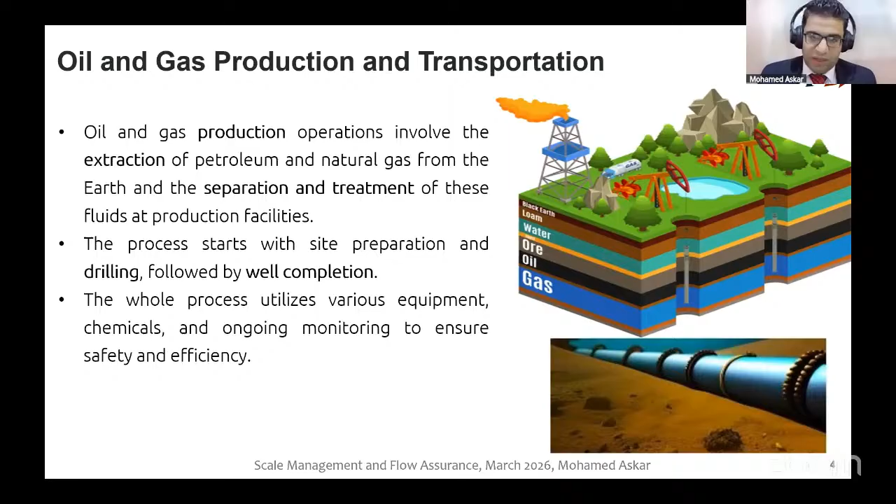Then I direct this production to the facility for separation and for consumption and for transportation and distribution to the consumer. But my point is to produce it safely without any problem, without affecting the integrity of the pipeline, without affecting the integrity of the well itself. So flow assurance means that I need to produce the hydrocarbon and reach its target without any problem.

This problem is maybe restricting the flow itself. My target is to maximize the flow, optimize the flow, produce the well as much as I can without affecting the resources, without affecting the environment. So I need to remove any obstruction inside the flow line and inside the well itself.

The second part is to prevent any leakage to the environment. This leak may affect the environment, affect the people around it. So I need to use many disciplines like chemistry, production technology, production engineering, and many other disciplines that can manage to make this mission successful and take the oil and the gas from underground till the separation and distribution efficiently and safely.

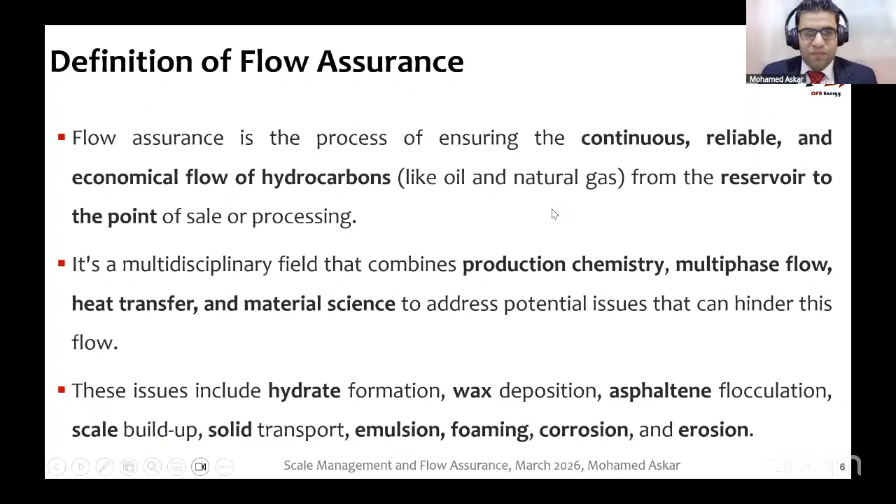So the most common types for flow assurance is that I have some blockage inside the flow line itself or inside the well downhole. This blockage may be scales, which is the main topic today. These scales may be calcium carbonate, barium sulfate, zinc sulfide. We have many types of mineral scales, and also some solid deposition called paraffin and asphaltene.

You can see the pointer right now, right? Is your screen good? Yes, we can see it. Yes, we can see it.

Good, great. So flow assurance, we talked that we don't need to restrict the production. We need to maximize the production rate and make it efficient production. So I need to remove any restriction inside the flow line itself, which may be scales, paraffin and asphaltene. We will see the difference between paraffin and asphaltene, and maybe hydrates.

Hydrates is a combination between gas and water, as you saw in the pre-course assessment. And also emulsion and foam. There are some types of that. You have a mixture. Emulsion means a mixture of oil and water, maybe emulsion oil in water or water in oil, but you have like a colloidal state between the two regimes, between the two phases, which have high viscosity.

So you have many pressure losses in the flow line. Foam means that you have a liquid and the gas, and you are having a mixture, and this mixture also makes additional pressure losses. For the integrity, corrosion means that you are interacting with the metal parts of the flow line and the pipeline and any metallic parts like the Christmas tree, the tubing, the casing, and affecting their integrity chemically. But erosion is mechanical, that you are producing some sand due to the impact of these sand particles.

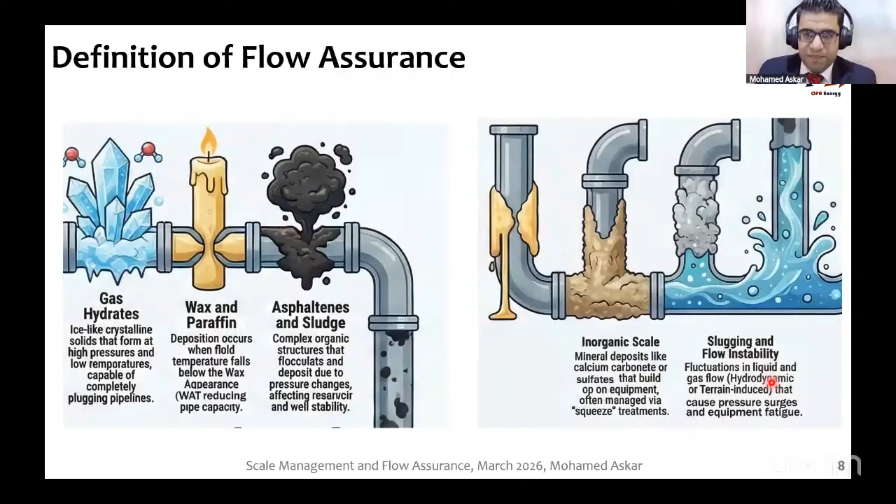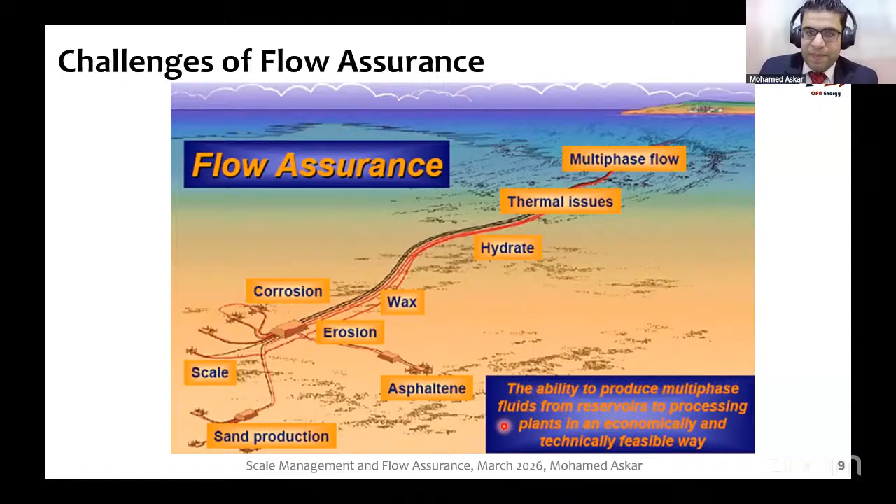So for a single flow line, I may have all the issues at the same flow line - I may see scales, hydrate or paraffin deposition. But for subsea pipelines, I may have corrosion inside and outside, because you are producing oil with water from inside the flow line itself, and outside the pipeline you have seawater. So you can use coating for the pipeline outside to prevent seawater interaction and prevent any outer corrosion.

For us as a petroleum engineer, what is my target here to care about? I care about the reservoir - I have hydrocarbon inside it, and I will start with the reservoir pressure. When the oil or gas flows from the boundary to reaching the sand face, it will have some losses. These losses depend on the permeability of the formation and the viscosity of the fluid, Darcy law, and other issues like pressure differential, length, and area. If you have some skin, that means you have scales or damage inside the formation itself, so I have pressure losses here.

Then you will have pressure losses through the completion itself. The completion means if you are producing from open hole, it means low pressure losses. But if you are producing from sand screens and gravel pack, it will be high pressure losses. Then I will have the bottom hole flowing pressure.

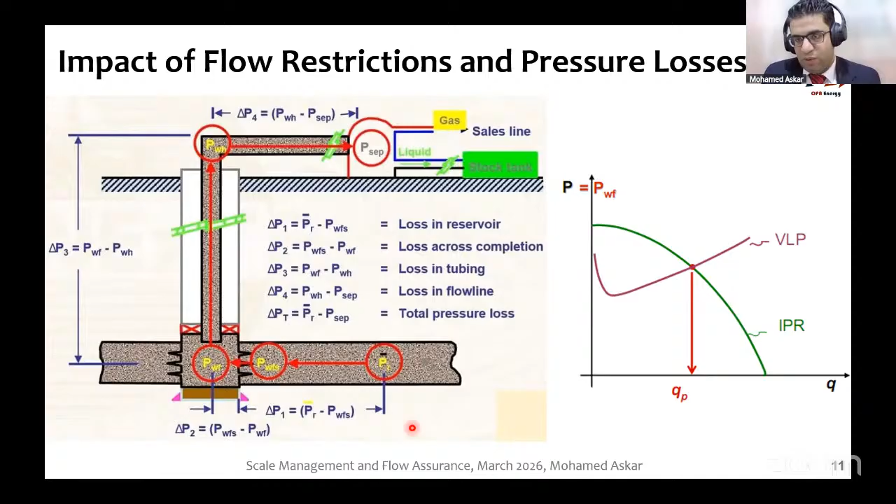So we agreed that we are producing oil or gas, but this oil may be accompanied by water or gas. In the reservoir, we have a gas layer due to its low density, then oil, then water. I can use this water by injecting it inside the reservoir to increase pressure and increase production. But at some time, I may see water breakthrough, meaning the water gets through the perforation and I now produce water with oil.

When I produce water and oil at the surface, due to low pressure, the gas will get liberated again from the oil. So in the pipeline, a horizontal pipeline, we'll see separated phases of gas, oil, and water. But do you see that it will be a pure gas, pure oil, and pure water? No, it will be gas with some droplets inside it, maybe dispersed oil or dispersed water. You should have some mist flow of liquids inside this gas.

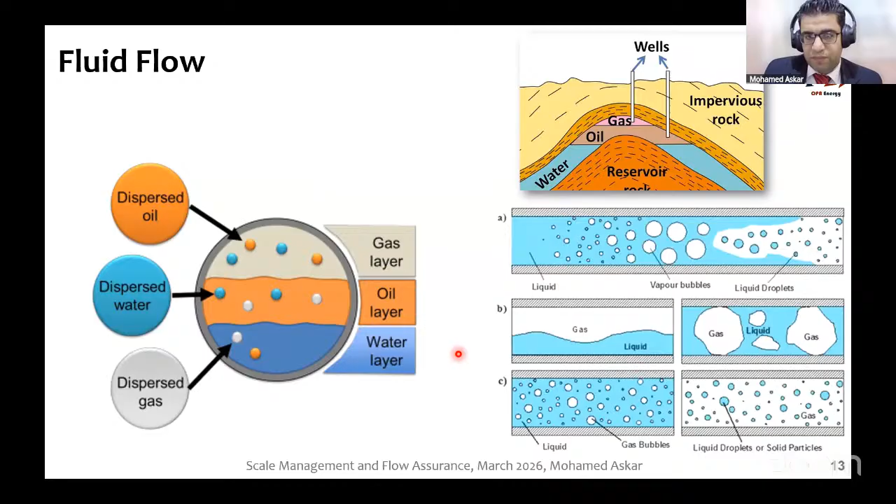But due to the crude oil itself, which may be oil or gas in the reservoir, having many components, these components number in the thousands, starting from methane, ethane, propane, butane, and complex ones like asphaltene and long chain paraffin. But due to the density itself or the oil state, I may have some black oil. This black oil is in the liquid phase in the reservoir, but after production, I will reduce the pressure, so I will get inside the two-phase region.

The two-phase region is where I will have multi-phase flow. For the volatile oil, it's the same, but the oil is much lighter. For the gas, I may have some dry gas, where the gas is in the gas phase at the bottom in the reservoir, and in the gas phase at the surface and the separation unit, without having any gas condensate. But for wet gas or gas condensate reservoirs, at the separation point, I will see some liquid.

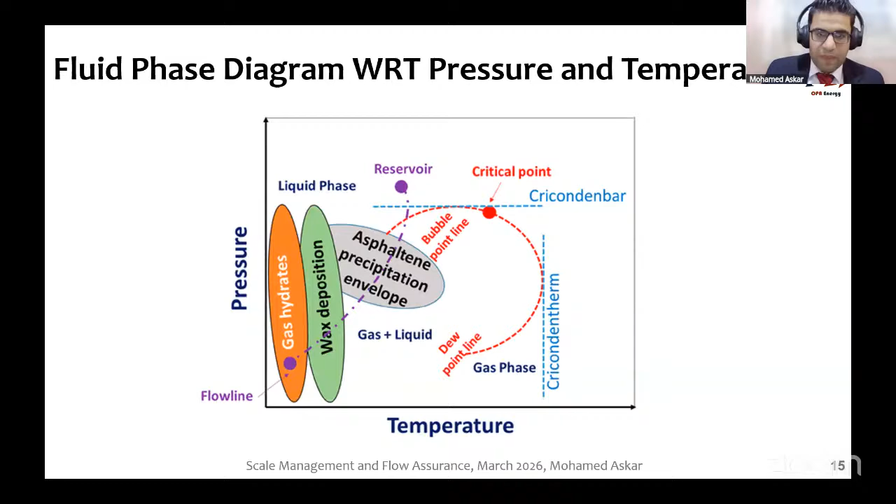So for flow assurance, we have many items to deal with. We should start with the reservoir fluids.

You should take a sample from the reservoir, the downhole sample - preferred to be downhole, not a surface sample, during exploration or first production, maybe during the drilling phase, drill stem test. We have tools like RMT, reservoir monitoring tool, MDT, modular dynamic tester, and RST, just to take samples downhole from the well itself against the perforation, keeping it under the pressure and temperature of the reservoir, then bringing it to the surface for more analysis to see what components you have - if it's water, what minerals are in it; if it's oil, what is the phase behavior, and what is the asphaltene and paraffin content.

So we'll start from taking a sample from the fluid itself. Then we study the sample to see if I have some problems inside the production - what is the viscosity of the fluids, what is the modeling, if I have some slugging or surging or not. If I have slugging, I use a slug catcher or smart choking or intelligent choking to prevent slugging.

And for heat transfer, we talked about how when you reduce the temperature, mainly for subsea applications and subsea flow lines, we'll see some flow assurance issues which may be hydrate, scales, paraffin, and asphaltene deposition. So I need to insulate the flow line to prevent heat losses.

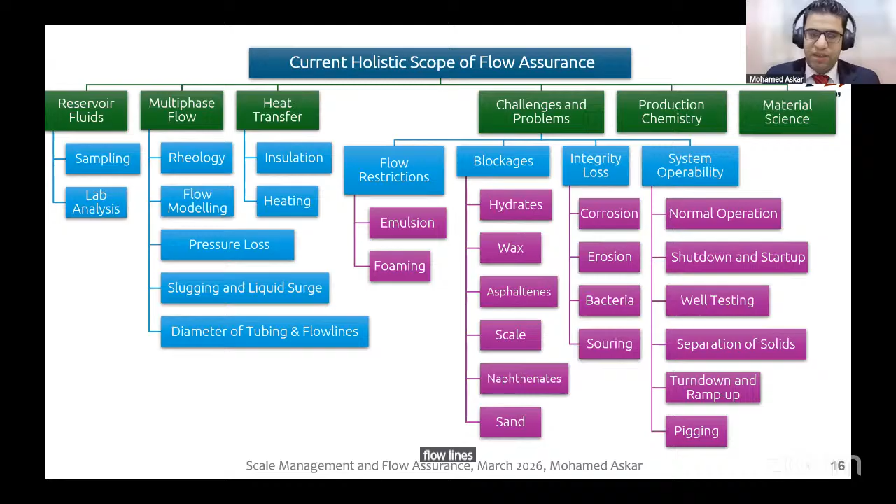We can also add other elements, maybe chrome, vanadium, molybdenum, nickel, aluminum, silicon, or other minerals that get inside the alloy itself and enhance its properties - enhance the corrosion property, enhance the elasticity, make it more ductile, enhance the stiffness and strength. But mainly we talk here about material selection for corrosion, so I need to use a corrosion resistance alloy to prevent the corrosion issue, which is a flow assurance one.

So here's an open discussion with you. What are the sources of flow assurance problems? You now know that we have flow assurance problems, so what are the sources of these problems? Can you tell me some thoughts about it? You can open the mic now. I'll wait for your answers and contributions.

Hello, guys. Can we have some volunteers?

Sorry, can you repeat the question? Yeah, what do you think are the sources of flow assurance? You know the problems of flow assurance are scales, paraffin, asphaltene, corrosion, erosion. I think pressure change, temperature change, all this will be a source.

Good, mashallah. So pressure change means that you are producing the reservoir without any pressure support, right? Correct. Good. Other attendees, do you have any thoughts about this one?

Also, I want to say water production will be a source of hydrates. MashaAllah. So when you produce water - our target is not to produce water, we are producing oil or gas - but this water may be due to formation water breakthrough or water injection fingering. And we have some water with the fluid itself, and at the surface we have some emulsion, agitation between the oil and the water, and we have some problems or maybe scales due to water or corrosion.

It may be chemical reactions or solid deposition, temperature and pressure changes.

Good. I will give you some hint about my answer. Do you think that drilling can affect flow assurance?

If you know the wettability, my formation needs to be water wet, so it can stick to the water and I can produce oil. But due to these chemicals, maybe surfactant or mutual solvent, they can affect and change the wettability to make my formation oil wet. So the production rate will be reduced.

I told you at the beginning that flow assurance means I need to produce the well, the system itself, efficiently with high production rate, economically with low cost, and without affecting the environment, without any leakage. Right? For production, my question for you is: production promotes pressure losses and pressure reduction, and also temperature reduction. You are producing from downhole, and during the pass from down till the surface and through the surface pipelines, you'll have temperature reduction, right?

Good. Do you have any other thoughts about the sources of flow assurance? Any other new guys?

Wettability alteration, due to water coning, chemical issues, water fingering, and excessive sand production. Some reservoirs are unconsolidated, so after production they produce sand and solids. This sand causes erosion for the flow line and tubing, and may promote emulsion.

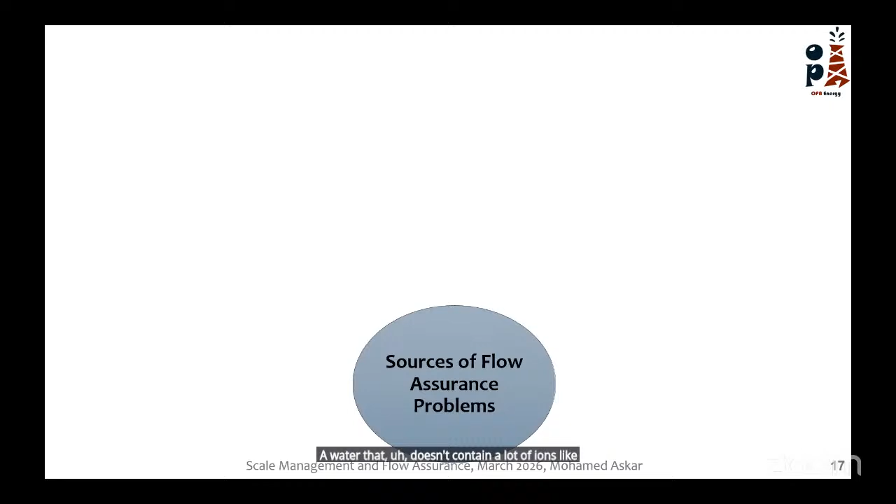What about water injection itself in the injector well? When I inject water in the well, can I introduce some damage to the injector itself? Yes, sometimes if we inject water that doesn't contain a lot of ions like chloride or sulfates, that creates a basic environment in the reservoir, and that favors shale swelling.

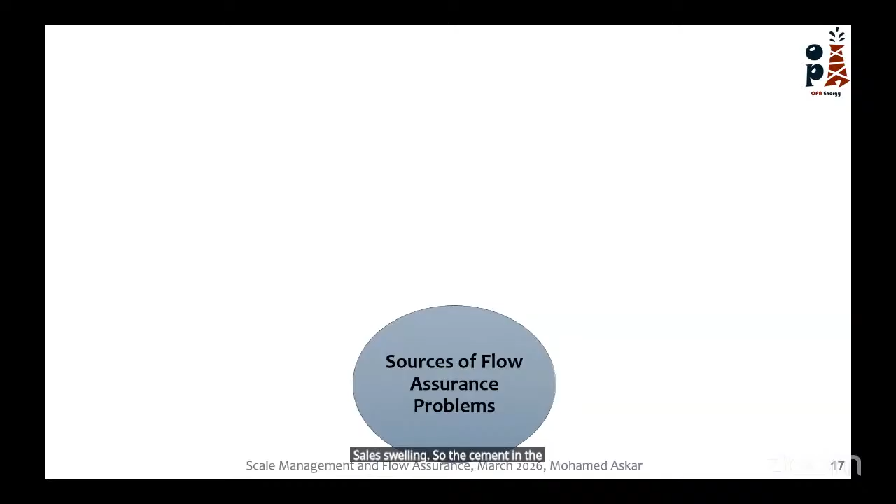The cement in the reservoir, like chlorite, kaolinite, or illite. This is called clay swelling - when you inject water inside the well and you have clay minerals in the formation, this clay gets some swelling, becomes bigger, closes the permeability, and makes damage, reducing the injectivity of the well.

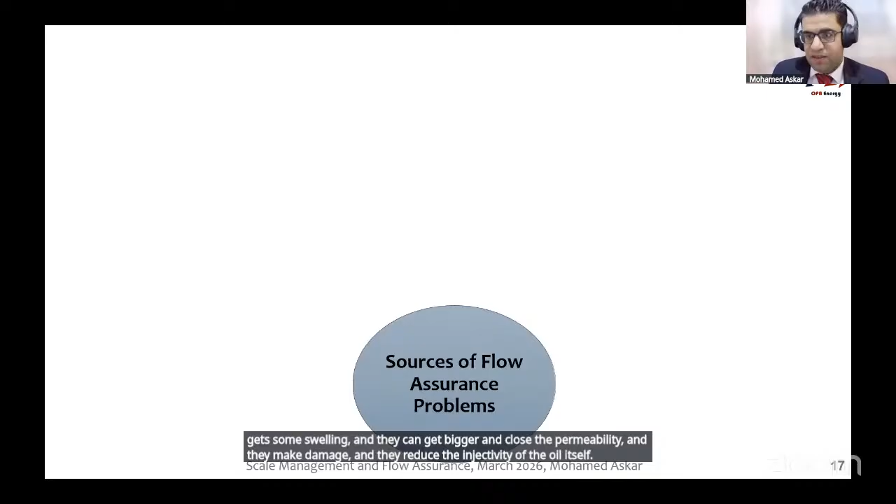It's a good point, and you also hinted about the quality of the water itself. You should make sure the water is good quality, will not affect the formation, will not cause plugging, will not cause scale deposition, and should not contain any oil.

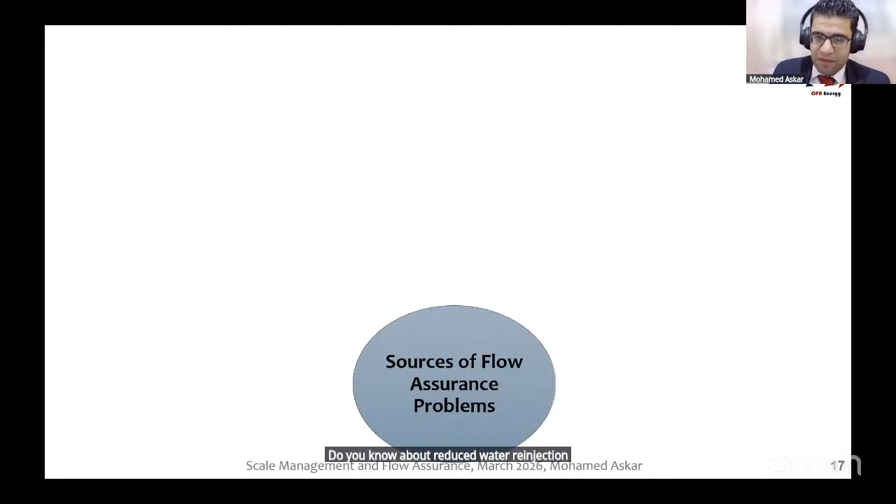Do you know about produced water reinjection, PWRI? When you take the production water and inject it again in the injector wells, you should process the production water and remove any solids, chemicals, and oil, because injecting them again inside the injector wells will damage the formation and reduce the injectivity with time.

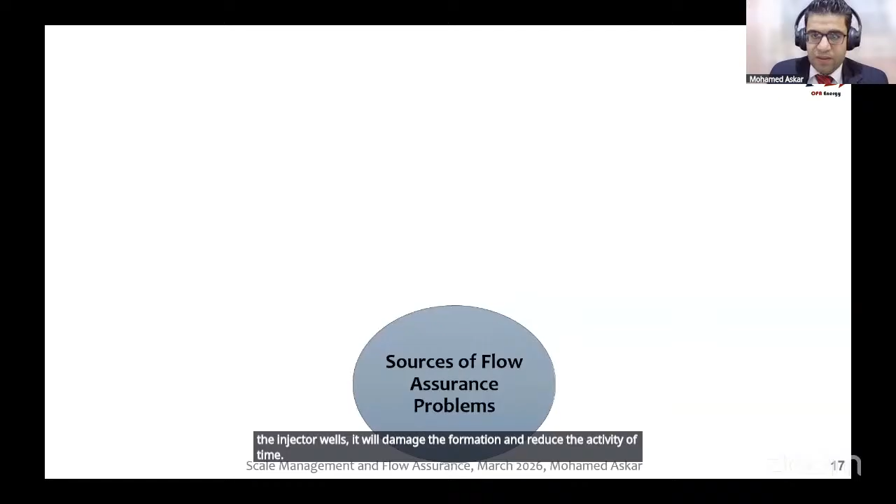Okay, good. So these are the issues and root causes of flow assurance.

We talked about drilling and completion. I can introduce some foreign fluids to the formation, and they may change the wettability. They may also introduce some solids - the mud filtrate and mud filter cake are solids and fluids that get inside the formation and affect the permeability.

During production, I have pressure depletion and pressure losses, and some gases will separate from the fluid, causing a change in pH - this is gas stripping. Some fluids can deposit asphaltene due to pressure and temperature reduction and heat losses, mainly for subsea applications and offshore wells. You have a big temperature decline, which promotes scale deposition and paraffin deposition.

We talked about restrictions and the completion inside the downhole completion. They introduce more pressure reductions, more restriction and choking, which reduces pressure and disturbs the fluid, potentially promoting deposition. We should design the surface facilities and downhole completion efficiently to prevent additional pressure losses, to conserve heat, conserve pressure, and to inject chemicals.

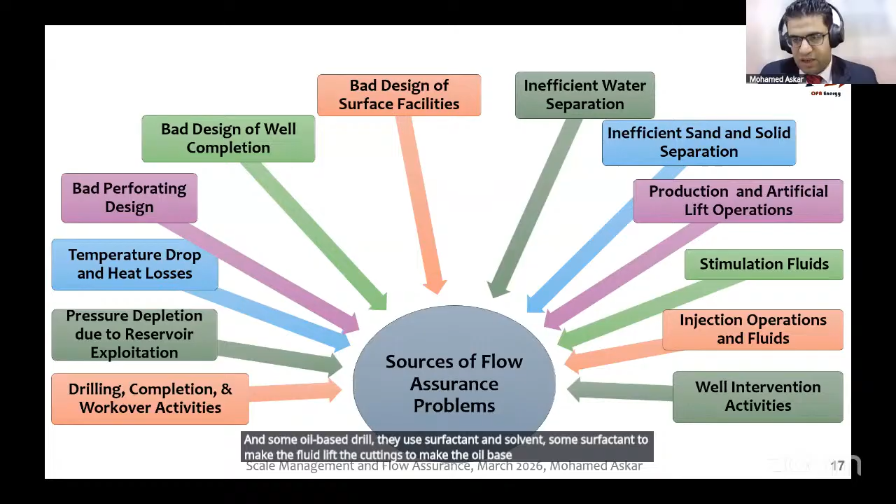Some oil-based drilling fluids use surfactant and solvent to help the fluid lift cuttings. When you find that the wettability of the formation has been changed, you should restore it by washing the grains with other types of mutual solvent and surfactant, maybe diesel, xylene, and hydrocarbons, to clean the grains and restore wettability. Surfactants may have different charges, negative or positive, depending on the formation itself.

For water, I should remove it from the oil to prevent emulsion formation, and remove it from the gas to prevent hydrate formation. The glycol unit is a unit that can strip and remove water from the gas stream.

For artificial lift, some pumps cause agitation, and gas lift also causes agitation and severe mixing of the fluids, promoting emulsion. Gas lift means injecting a large amount of gas through a small valve, which expands very fast due to the Joule-Thomson effect, introducing more cooling to the well, and this cooling promotes scale deposition.

For stimulation fluids, injected acids may interact with asphaltic crude oils and produce sludge, a type of formation damage. For injection operations, injection water should have good quality to prevent formation damage to the injector. Any fluid introduced to the wellbore should use corrosion inhibitor, scale inhibitor, anti-clay swelling agent or clay swelling inhibitor, and other additives like oxygen scavenger, to prevent corrosion, interaction with the fluid, and deposition inside the formation, preventing formation damage.

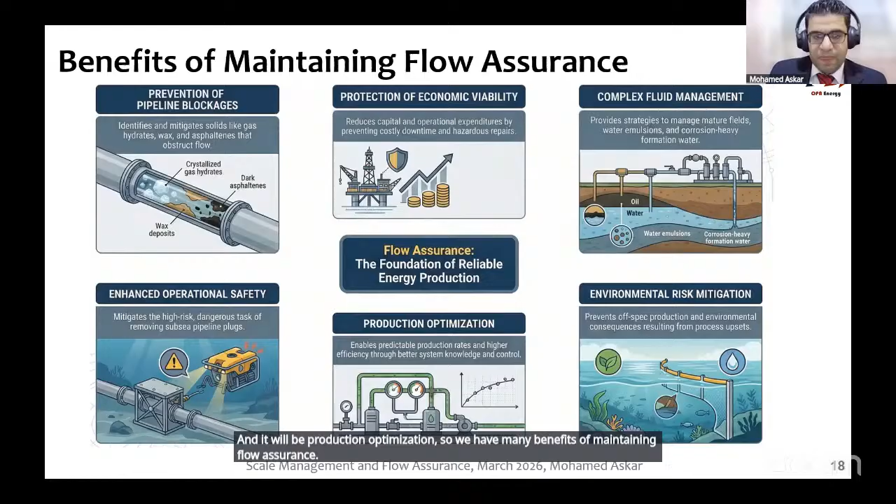So this is a question for you: what is the starting point to apply flow assurance issues or flow assurance management? My opinion is I will start from production, since I am producing oil and gas, so I will care about flow assurance to see what issues I will face inside the process facilities. Do you agree with me or not?

Hello guys, do you have any thoughts about my opinion? For me, it's development actually. What is the reason? For other participants, do you have any thoughts about what is the starting time to care about flow assurance, during production or development?

Good, so you agree with me and also with Rawa, I think. And Ibrahim mentions in the comments that within the flow we can detect flow assurance issues and see the phenomena. I need some other guys' thoughts, we have 27 people in the webinar, it's okay to say what you think, it may be wrong or right. I said my opinion, I will start flow assurance from production. Is it right or wrong?

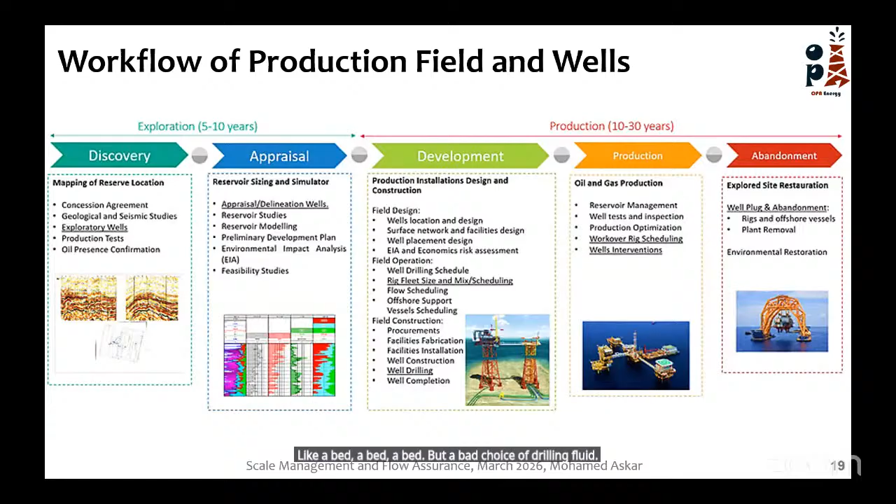Okay, so we care about flow assurance when we start production. Yes, but sometimes we can face it in the discovery phase, perhaps due to a bad choice of drilling fluid or a bad design of completion. Good, this is the answer I'm waiting for. My answer, to care about flow assurance only from production, is actually a very wrong answer. I told you from the beginning that I take a sample from the reservoir fluid under reservoir conditions and make an assessment to see what conditions or problems I will face during production.

And you mentioned that when I see the fluid, I will design the completion phase, the completion string to optimize and prevent this problem, maybe by downhole control injection, maybe by chemical injection at the surface. So from seeing the hydrocarbon, from seeing the reserve, you should take samples.

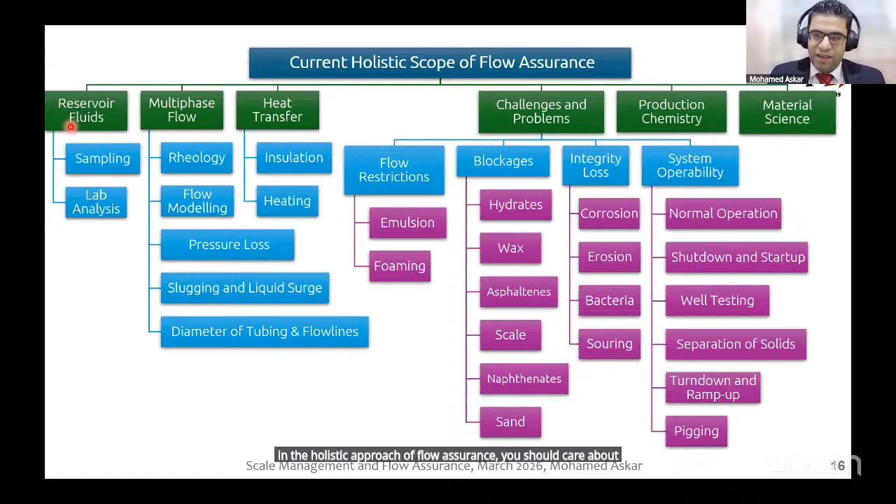If you remember this slide, in the holistic approach of flow assurance, you should care about sampling and fluid analysis. So it will be done in the discovery phase, as you mentioned. When I say a discovery, I should test it and take samples and to foresee and forecast what will be my design for the flow assurance system to prevent the problem before happening and to repair it or remove it or clean it after happening, right? So now we agree that we should care about flow assurance in all phases, starting from discovery.

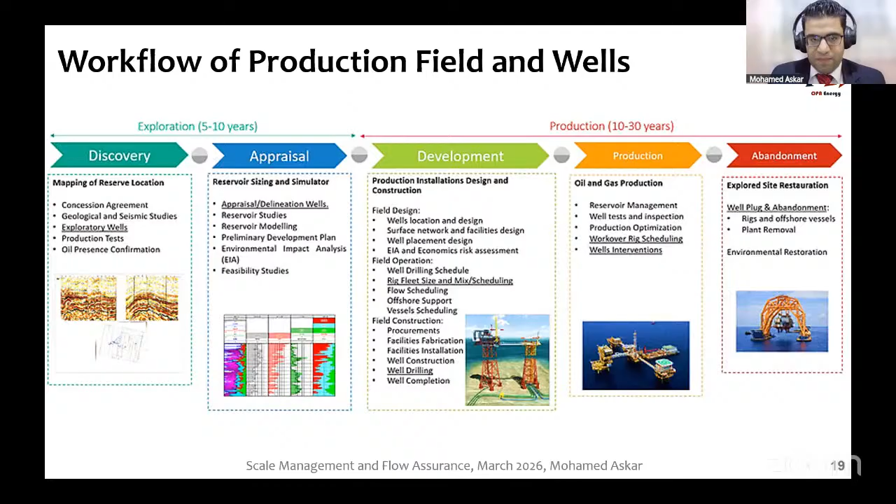We'll take every part, like 10 minutes for everyone: hydrate, paraffin, asphaltene, scale, and corrosion. Do you need to take some break now? It's okay for me, I can continue. If you want to take a break, it's okay. Adil? Sahar, do you have any idea to take a break or just complete the session? Okay, I will complete, I didn't receive any answer, so I will complete. And if you have any question, just stop me. Okay, please continue. But don't hesitate to just stop me and intervene during the session and ask me any question you need.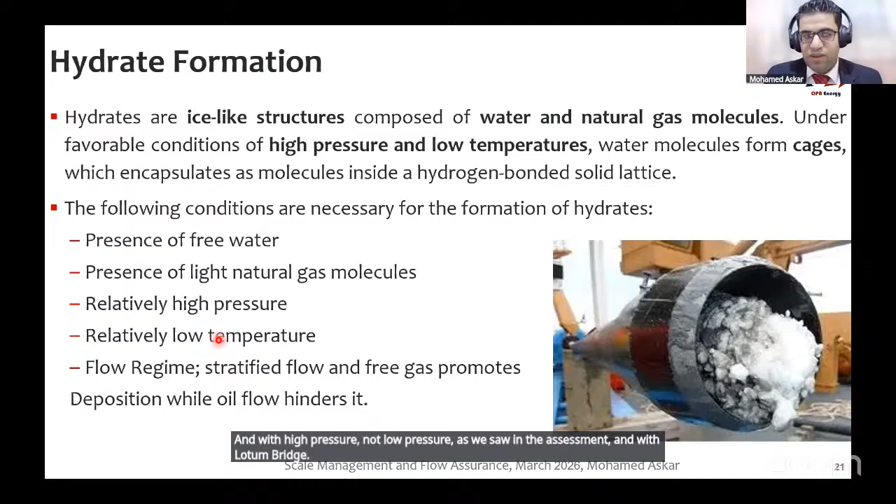We talked that hydrate is a type of flow assurance issue that can be composed from water, from light natural gas molecules, mainly methane, maybe ethane, and with high pressure, not low pressure as we saw in the assessment, and with low temperature. So this one will form a cage where the hydrocarbon gas molecule is trapped in the water molecules, and it will be changed from the gas phase and water phase to be a solid, like this one. If you know that we have some unconventional reservoirs, one type of them is called gas hydrate, and we have some hydrates like solid particles, and when you pump hydrate inhibitor or heat it, it will remove the water and the gas from each other and break the hydrate structure itself.

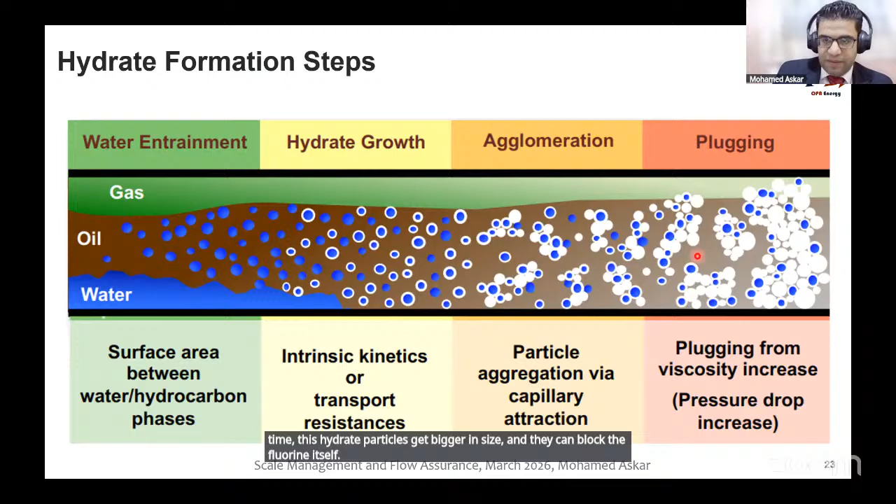So we'll start, as we mentioned, we have many phases in the stratified flow: gas, oil, and water. And we mentioned that not all of them will be pure gas, pure oil, and pure water. We have some mixed particles between all the phases. And with high pressure and low temperature, this gas and water may interact with each other and form some hydrate particles. After some time, these hydrate particles get bigger in size, and they can block the flow line itself.

Okay, so where can the hydrate form? We talked that it can form mainly for low temperature applications, which will be subsea wells. We have a well, which is a subsea Christmas tree, that your Christmas tree is wet. It's now underwater and it's located above the seabed, and you are producing hydrocarbon: gas, oil, and water. Hydrate can be a mixture or a...

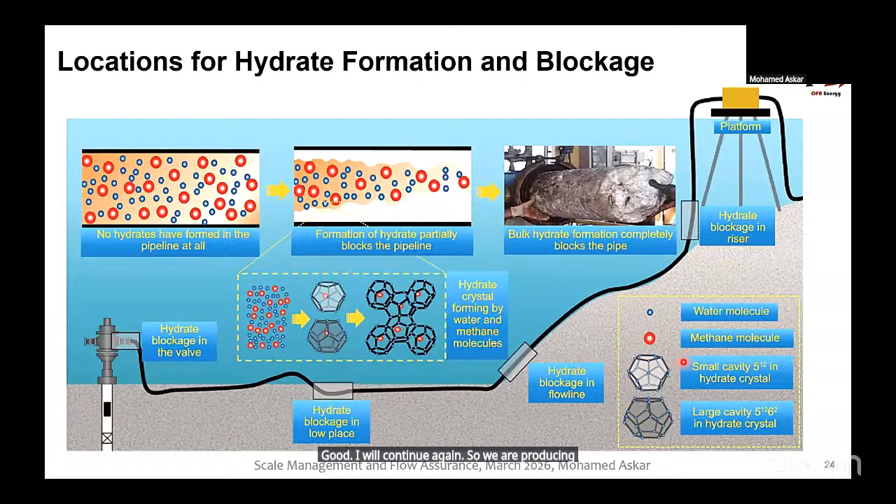I will continue again. So we are producing hydrate mainly here for the subsea application. We have a subsea well and subsea flow line reaching the platform. So during the journey of travel, I have some hydrate maybe after valve throttling or choke restriction, maybe for water accumulation, maybe for a riser or vertical parts. And this is an actual photo of hydrate getting outside from a pigging trap.

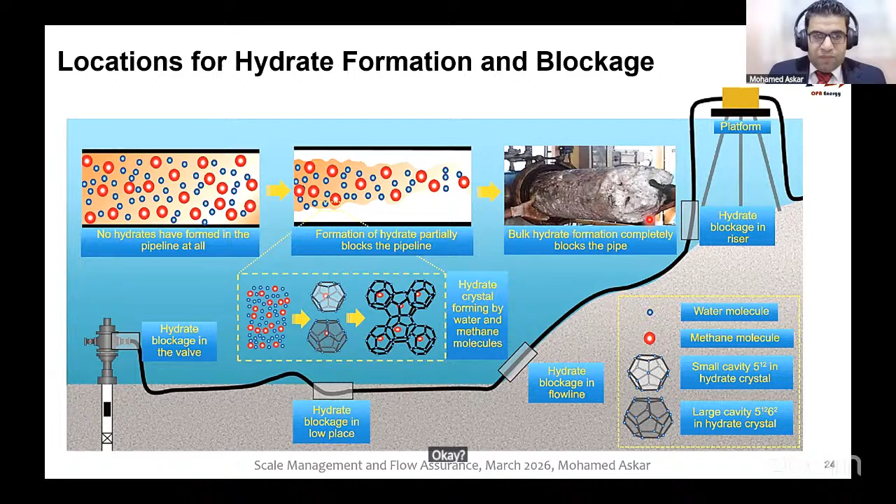So what is the risk of hydrate? You have a solid in the flow line and you have flow, but you stopped the flow. So you'll have high pressure behind the hydrate plug and low pressure after it. When you have this high pressure and you inject some fluid to dissolve the hydrate or heat it to dissolve it, this hydrate is like a bullet, like a missile that can go very fast through the flow line. It can damage the flow line at the elbow section. It can damage the valve's mechanical parts.

So you should take care about the hydrate, mainly for well intervention applications. If you know that the PCE, pressure control equipment, like the lubricator, grease injection head, and risers, and all the stuff of the well intervention equipment for slick line and E-line, we have some leakage of gas. This gas leakage may introduce some cooling for the fluid and promote hydrate formation. And when you reduce the pressure or bleed pressure, this hydrate plug can move and can damage the equipment after it. Okay.

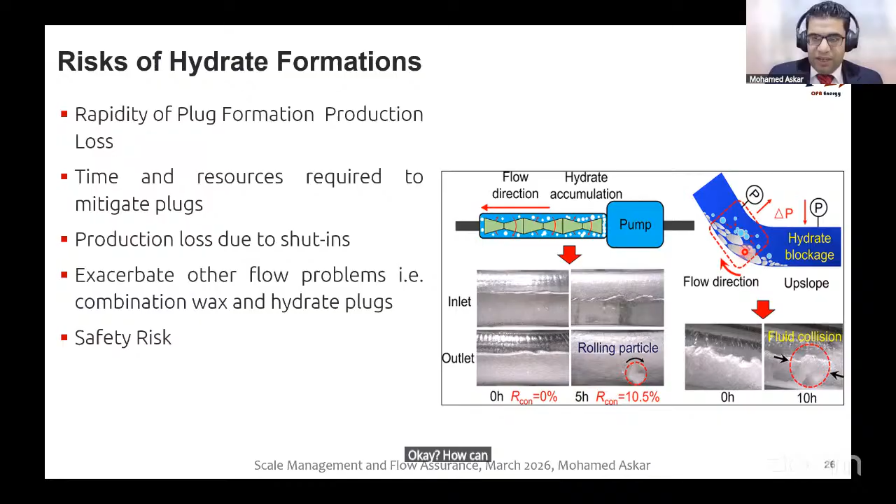How can I detect hydrate during production, not well intervention? By many methods. I can measure pressure and temperature in the flow line to see if there is high pressure reduction or temperature reduction that can promote hydrate or indicate the hydrate formation plug. I can also detect it by many sensors, depending on ultrasonic detection, acoustic detection, or density meters like gamma ray densitometer, or any electric probes, or fiber optics like DTS or DAS, distributed temperature sensing and distributed acoustic sensing. So we have many methods to detect the hydrate plug formation during production and through the flow line.

My mission here for this graph is that I have high temperature, and when I reduce the temperature, I may face some hydrate. During the design phase, you determine the design temperature and design pressure you will see during the production phase. Then by seeing the equilibrium phase, you see what subcooling temperature you need to overcome to get outside this region, because in this region you will have hydrate deposition.

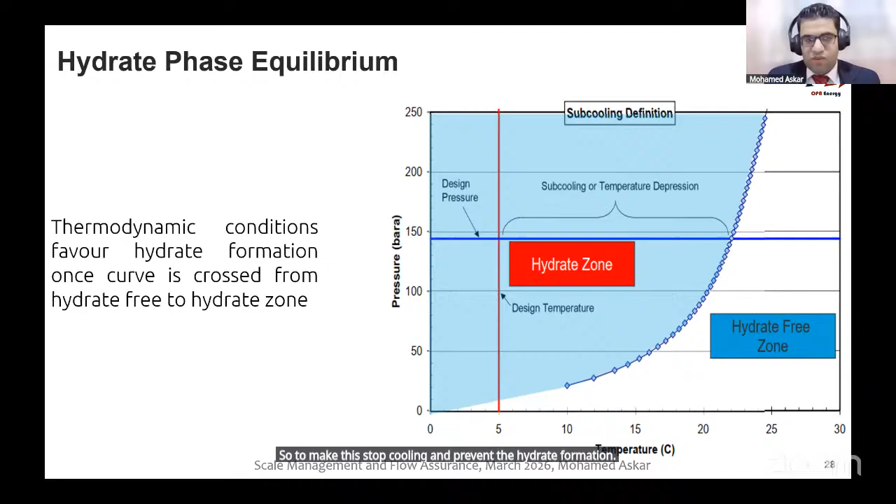So I need to pump some methanol, ethanol, glycols, or any hydrate inhibitor, maybe thermodynamic hydrate inhibitor or low dosage hydrate inhibitor, to create this subcooling and prevent hydrate formation. When I pump or inject methanol or ethanol, it's called thermodynamic hydrate inhibitor, and I will not see any hydrate in the flow line. But there's another category called low dosage hydrate inhibitor, which has two subcategories: kinetic hydrate inhibitor and anti-agglomerant.

Kinetic hydrate inhibitor can delay hydrate formation, so if you have a short flow line, you can just inject this with low dosage, low pumping. But thermodynamic hydrate inhibitor uses a huge amount of chemical, and it's just a delay of hydrate formation. Anti-agglomerant means you have some hydrate particles, like microcrystals, that don't get bigger and block the flow line.

We talked about heating and heat prevention. We have some coating to prevent heat losses, which is called insulation, and we have some heating systems by electricity, with heating cables around the flow line. I have internal flow lines carrying production fluid inside, and electric cables around it. When I use electricity in these cables, it will heat up and heat the flow line and the inner fluid itself.

Also, I have the internal pipeline and the external pipeline. I can inject hot fluid between both of them, or I can just have insulation between both of them. If I have insulation between the two pipes, it will be called dry insulation.

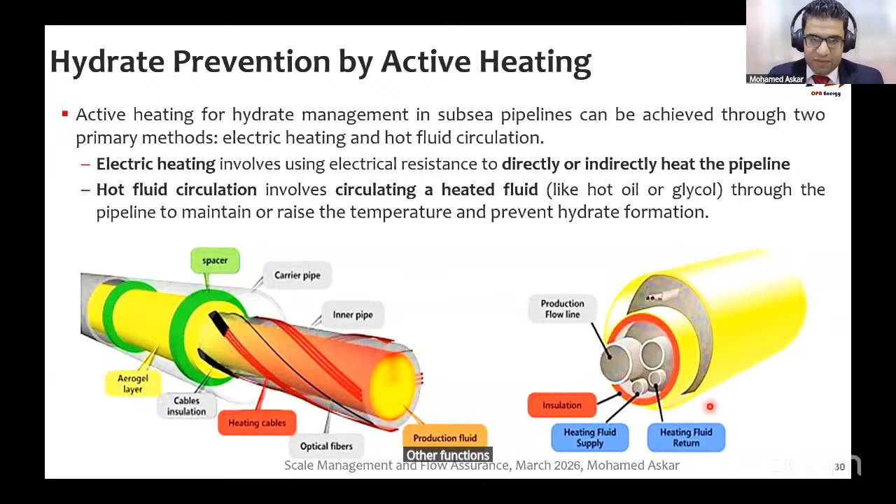So as a wrap-up for hydrate, I can remove or prevent hydrate by removing water, through gas dehydration or water cut reduction, or I can use thermal methods. I told you that during startup and shutdown, I will have some flow assurance problems, mainly hydrate due to low temperature.

So during shutdown, you can push your fluids to the formation and prevent hydrate formation or other issues, keeping them in the hot region downhole, not at shallow depths with low temperature. Thermal methods may involve insulation to prevent heat losses, or heating systems. Chemical methods use ethanol, methanol, glycols, low dosage hydrate inhibitor, and salts to prevent or inhibit hydrate formation. But if you don't have any hydrate formation, it's okay, you don't need to take any action.

The new topic will be paraffin.

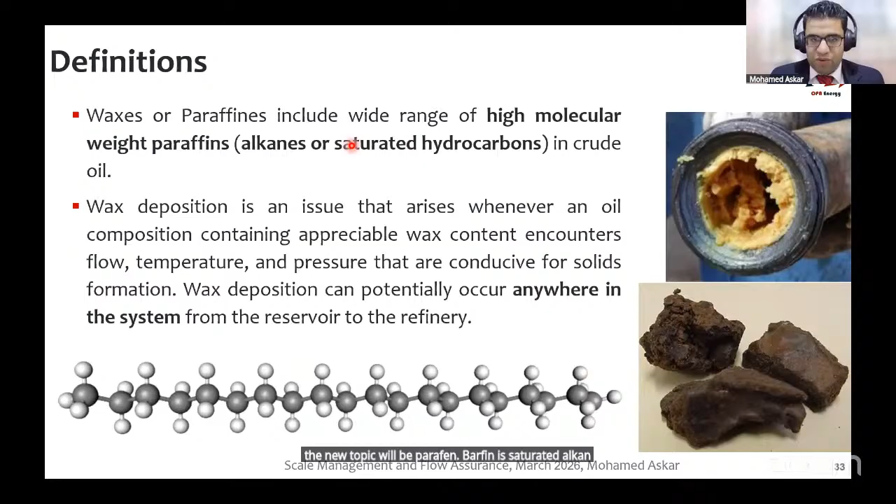Paraffin is saturated alkanes or saturated hydrocarbons, which may be very long chains like normal paraffin, isoparaffin, or cycloparaffin, but all of them are paraffin, saturated alkanes. It's heavy molecular weight hydrocarbons dissolved in the crude oil itself, and due to temperature reduction, they get out of solution and deposit on the flow line.

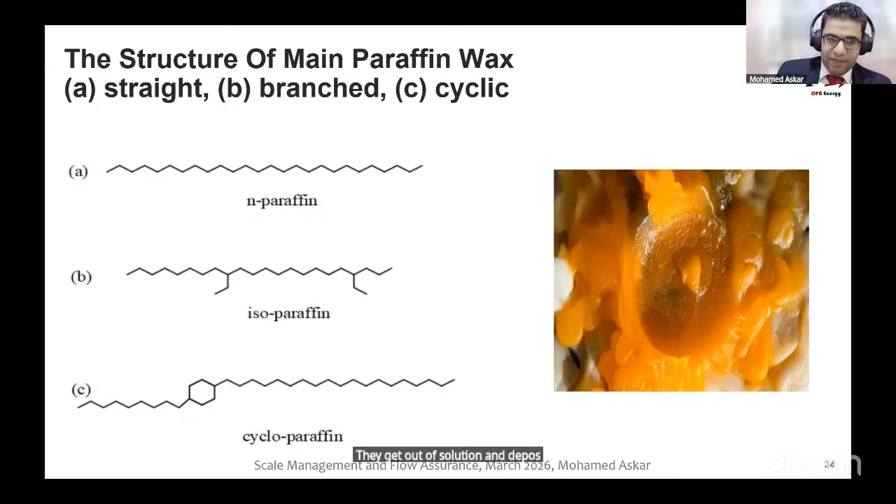There are many theories about the deposition of paraffin, but the most famous one is diffusion: you have layers of paraffin deposition on the pipe wall, and new deposition that can diffuse inside the solid layer. After some time it gets aged, becoming high density like a condensed layer, and it can deposit on the flow line wall or the tubing wall itself.

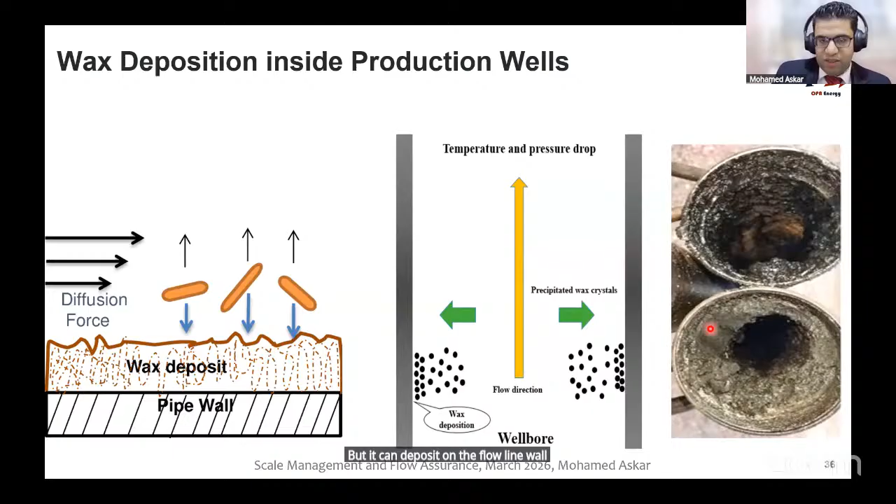This slide shows actual completion strings retrieved from the well. You can see many deposits of paraffin and hydrocarbons that can restrict the flow of fluid and prevent any well intervention job, like going down through the well for perforation, logging, setting plugs, or any downhole jobs.

What makes paraffin deposition? It's mainly temperature. If you have low temperature, it will promote reaching the wax appearance temperature or pour point of the crude oil, causing the solid to get out of solution and deposit on the flow line.

Also some other issues can promote paraffin deposition, maybe gas coming out of solution, or having some roughness, an irregular or rough surface that can stick the fluids and paraffin on it, promoting their deposition. Also any injected fluids from the surface will have low temperature, so they can promote paraffin deposition.

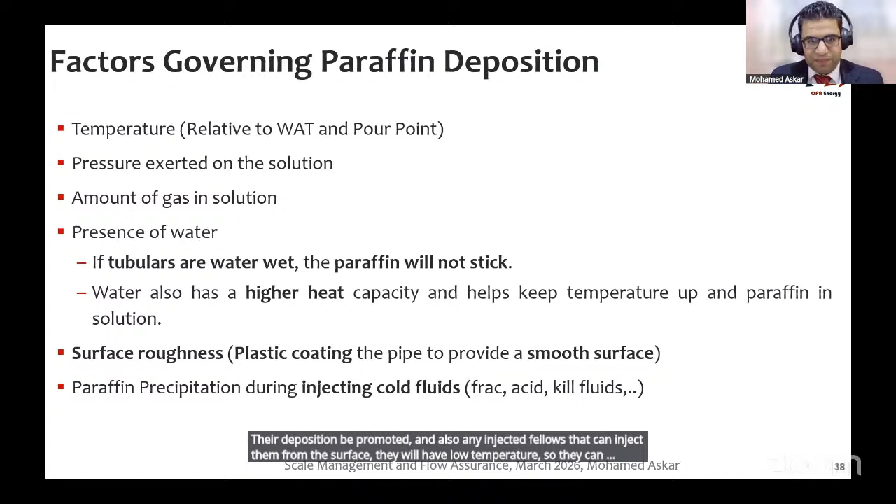Asphaltene is different from paraffin, not the same topic. Asphaltene is not soluble in crude oil. Most of you answered this question wrong in the assessment before the seminar, saying asphaltene is a soluble hydrocarbon component, which is wrong information. Asphaltene is part of crude oil, but it's not soluble.

It's like in colloidal phase, suspended, dispersed, and stabilized by some chemical hydrocarbons like resin that can stabilize them in the solution. When you remove resins or have pressure reduction, these asphaltene particles can get to each other and form more asphaltene deposition that can deposit in the flow line.

They are harder than paraffin, and also harder to clean them. You can use diesel for paraffin, but here you can use diesel, toluene, and xylene, and other chemicals to remove the asphaltene deposition in the flow line or formation.

Also, during well intervention, you may have some asphaltene or paraffin deposition inside the tool itself, as part of PLT, the production logging tool equipment, which can hinder your operation and prevent a successful job.

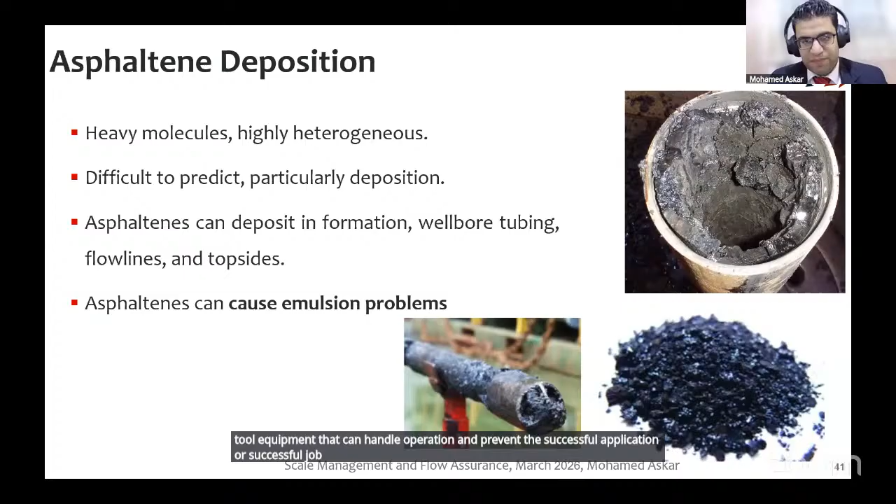Do you have any question till now? Any contribution? Any inquiry? Okay.

Scales. When you say scale, it means you are talking about mineral scale. Mineral scale means you have some ions dissolved in the water, and due to favorable conditions of low pressure, high temperature, or mixing, these dissolved ions get to each other and interact to form a deposit. This deposit gets out of solution and forms the scale deposition.

It's like the grain, we have a grain of sandstone, called quartz grains of sandstone formation, and we have some scale deposition between the grains itself. It's like crystals, like salt and sugar crystals, not like paraffin and asphaltene. It's now a mineral one, not a hydrocarbon one.

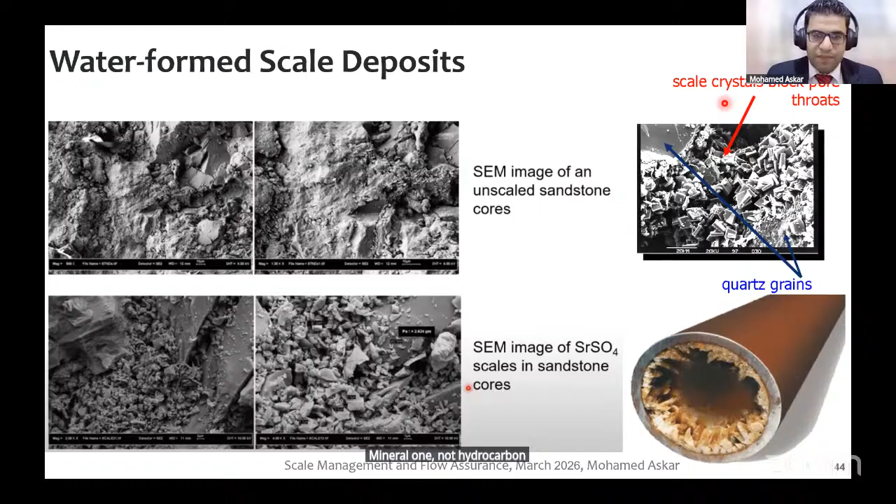We have many types of scales, depending on their cations and anions: maybe sodium chloride, calcium carbonate, iron carbonate, iron oxide (especially for injector wells), iron sulfide, zinc sulfide, lead sulfide, calcium sulfate, strontium sulfate, barium sulfate.

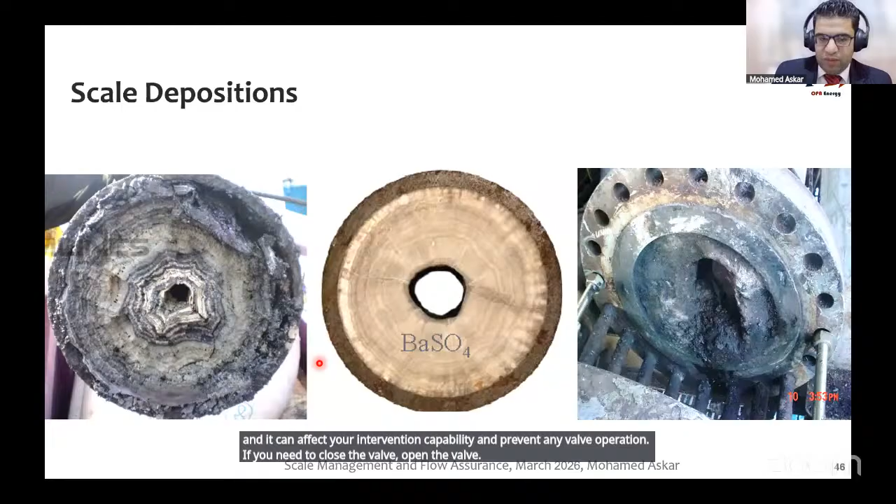From these pictures, you can see the main restriction you saw from the flow line. How can you produce from this small area? It will produce more pressure losses and can affect your intervention capability and prevent any valve operation. If you need to close the valve, open the valve, or control the choke, it will malfunction the equipment you are dealing with.

So scales start with dissolved ions, and they have some ion pairing. They interact with each other and form a microcrystal, and this crystal will get bigger with time, reaching the scale deposit itself.

What will make scale deposit? As stated in the beginning of the session, it may be changing conditions: pressure reduction, temperature reduction, or pH reduction. When you reduce pressure, you will promote some scale deposition. But for temperature, when you reduce it, you will promote scale deposition for all types except calcium ones. For calcium carbonate, this is a question in the assessment: when you increase the temperature, you will promote scale deposition of calcium carbonate.

If you are dealing with completion or drilling fluids, when you inject some fluids containing calcium or calcium carbonate in the well, you are pumping it with low temperature from the surface. It will go down to the well downhole. When the temperature gets higher, you will have some calcium carbonate scale deposition against the perforation. So most scales deposit when temperature goes down, but calcium-based scales deposit when you have an increase in temperature.

You can see some scales in your house heater in the bathroom. When you open it, or in the kettle or boiler, you have some white deposit. It's called calcium carbonate. When you increase the temperature and you have calcium and carbonate ions dissolved in the water, they will interact with each other and form calcium carbonate scale.

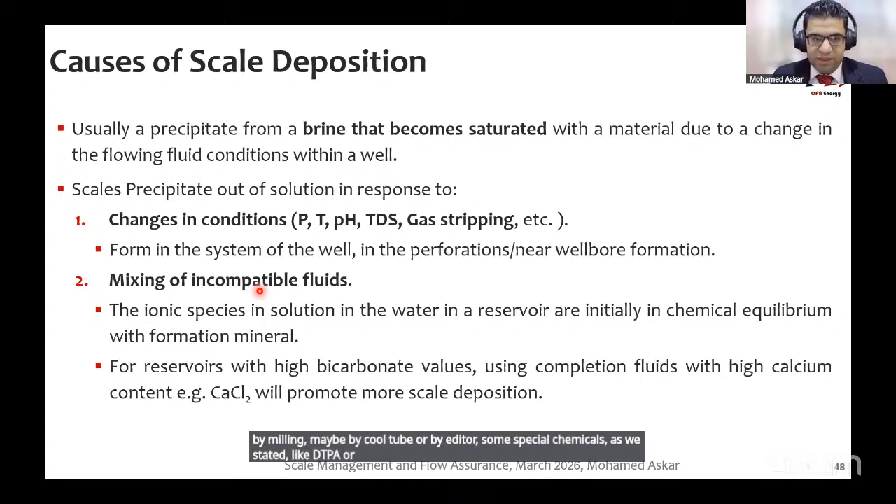This is the operation of mixing of some waters. I have a high permeability streak in the formation, and I inject water from injector wells. The injection water goes very fast through this streak, and during production, the well will face some formation water. So they will interact with each other and form scales downhole at the bottom part of the completion. It's called hard scales, mainly sulfate scales, due to the water mixing.

So how do you monitor scale deposition? You can monitor the productivity index and production rate of the well. As we talked about, we should test the well periodically to see if there are problems of scale deposition or flow assurance issues or formation damage. If I lose some ions from the water, it means that these ions have already interacted with some ions downhole and produced scale deposition downhole.

If you have injection water breakthrough, some companies measure the chloride of the production water, and when this chloride changes, they will figure out that they have water breakthrough. They can also figure out this phenomenon by running PLT, production logging, to see that the injection water has made some fingering or coning or breakthrough and is now being produced with the production fluids.

Also for scales, I can detect the total suspended solids, not total dissolved solids. This means you take a sample from the water and measure how many solids it contains, called TSS, to figure out the type of these solids, maybe sands or scales, to detect if there is scale deposition inside the well itself.

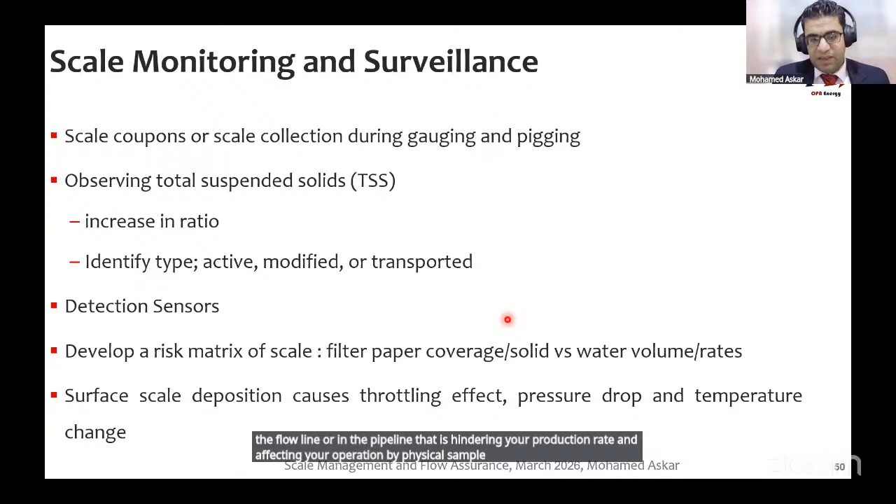So how to prevent scale? I should pump scale inhibitor. This scale inhibitor may be pumped through a macaroni string.

If you have a completion, we have a packer, and you can have a small tube that injects some scale inhibitor to mix with the fluid at the bottom part for getting inside the flow line. Also, I can inject some scale inhibitor with the gas if you are using gas lift, but this is not common. This scale inhibitor will get inside the flow stream through the gas lift valves and prevent any scale deposition.

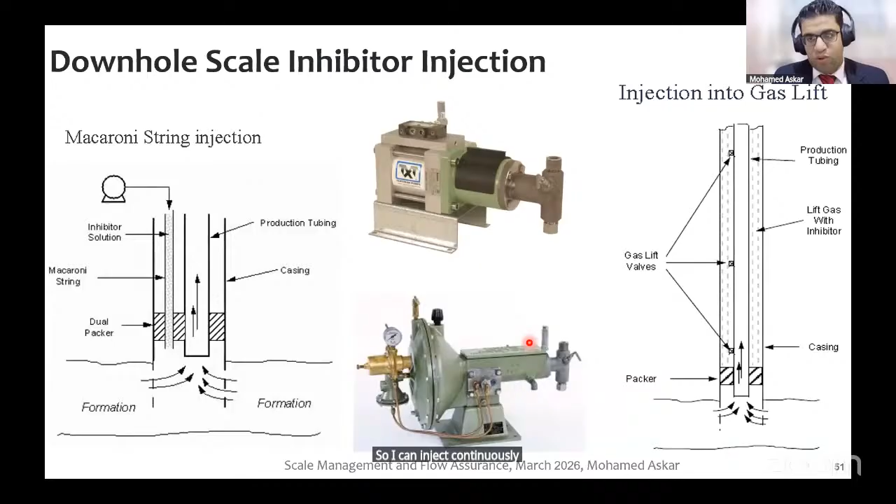But also you can use a small pump to inject the scale inhibitor in the flow line itself, so I can inject continuously downhole or at the surface. But for the well, they can use a squeeze job, bullheading, to inject fluids inside the formation and make the scale inhibitor adhere to the formation itself, where it can be produced with time.

I have a spearhead or pre-flush that conditions the formation to receive the main treatment, and the main treatment contains the scale inhibitor that will be stored in the formation. The overflush is like a displacement of the fluid.

The fluid moves to a far away area with low velocity of flow that will affect the chemical desorption. You have two phenomena: chemical adsorption, where it sticks to the formation, and chemical desorption, where it is now produced with the fluid and prevents any scale deposition during production.

My last topic, inshallah, will be corrosion. Do you know corrosion? Yes, we all know corrosion. Corrosion is the interaction between the metallic parts and oxygen and water, meaning there is oxidation of the metallic component, and it leads to deterioration and damage to the flow line or the metallic part.

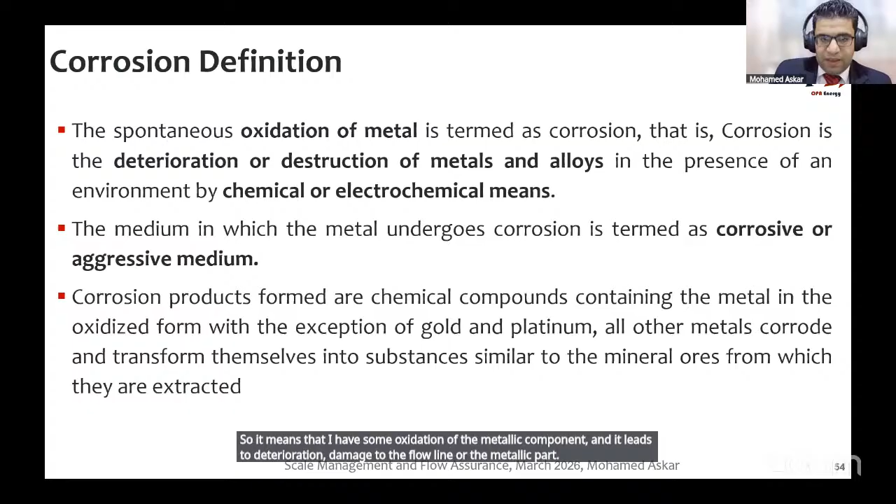Can we see it? Yes, we have anode and cathode. Anode means that we have iron that gives electrons, and it will be dissolved in the fluid as an ion. So I am now losing iron here.

But here we have electrons get through the pipeline, and these electrons can interact with hydrogen and oxygen and produce water or produce OH, hydroxide ions. So I am now losing iron ions at the anode, and it will deteriorate the flow line itself.

So it's a simple mechanism of corrosion. But corrosion in the industry has many types. Maybe uniform corrosion, where you have corrosion interaction across all parts of the metal itself.

Maybe pitting, where you have coatings that prevent corrosion, but this coating, mainly for stainless steel, gets jeopardized by chlorides, causing metallic attack to this pit and increasing the corrosion for small pits. It's called localized corrosion, and we have many other types of localized corrosion, maybe crevice and intergranular.

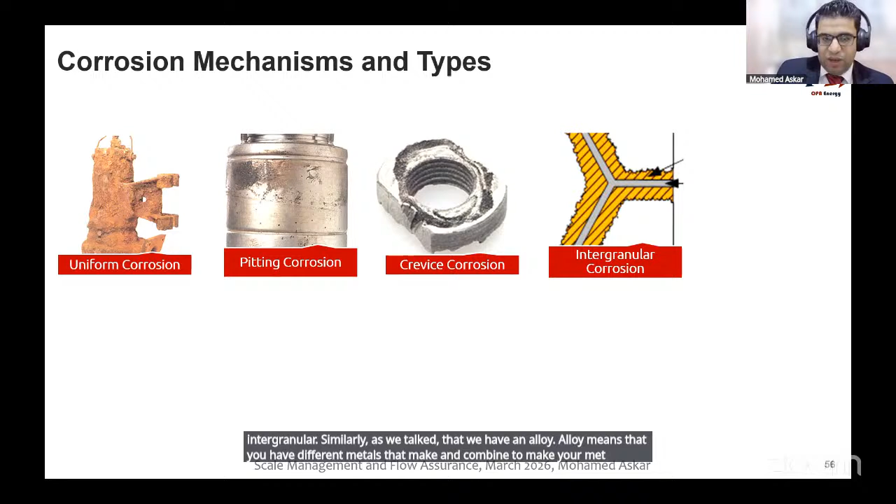It's similar, as we talked, that we have an alloy. Alloy means that you have different metals that combine to make your metal. But you have problems at the boundary between the alloys itself, and this is localized corrosion.

Galvanic corrosion means that you have different metals, one acting as an anode and one acting as a cathode, so the anode will be deteriorated. So it's mandatory, if you are using a completion, not to use many different alloys in the completion itself. You should use very similar metals, or the same ones.

Erosion corrosion means that, for an impeller in a pump, corrosion and erosion are now combined to deteriorate the metal due to the aggressive action of chemicals, solids, and sand.

Selective leaching: you have an alloy and some element of this alloy, maybe zinc, is taken and stolen from this alloy to be dissolved in the water itself. So it's like selective leaching, selective taking of ions, but eventually it will affect the integrity of the metallic part or metallic component you have.

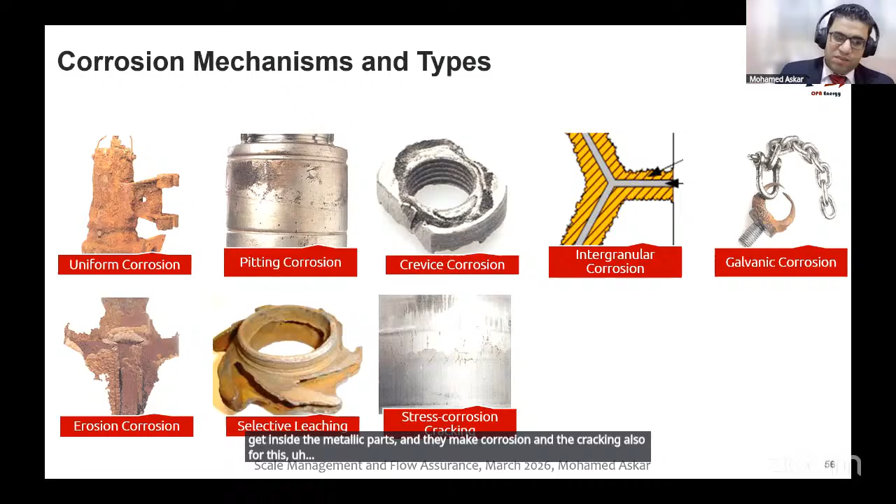Stress corrosion cracking: we have some high pressure gases, especially H2S, that can get inside the metallic parts and cause corrosion and cracking for metallic components, especially turbines, if you are using turbines with high pressure gases containing H2S.

Cavitation corrosion, especially for pumps. With this type, you have gas bubbles that get exploded at the surface of the metallic component, the impeller. That can cause heating and impact that damages the metal.

The last one is hydrogen embrittlement: hydrogen gas gets inside the metal in the pores itself at high pressure, and when you reduce pressure, this hydrogen gas can expand and damage the metal part itself. So it's many mechanisms of corrosion combined with others, like corrosion, erosion, and gas expansion.

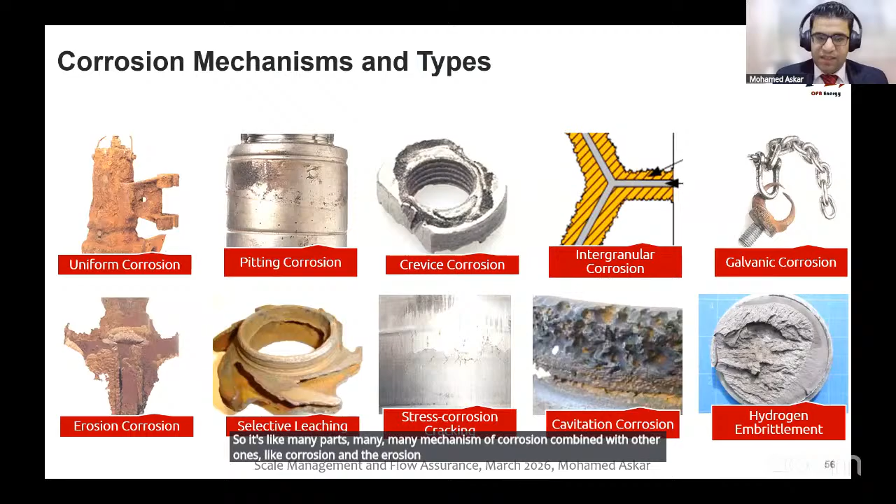How to prevent corrosion? At the beginning, I should not use any corrosive fluids. If it's mandatory to use them, or your fluid is corrosive, I can use corrosion resistant alloy. You can also use coating inside the flow line or tubing to prevent interaction between the corrosive fluids and the metallic parts. But all of these are for internal corrosion.

For external corrosion, for wells, the casing has cement around it. This cement should have a good bond to the casing, covering it from all directions to prevent interaction between the aquifer water and the casing itself, which causes outside corrosion.

For static parts, like above the packer, you can use inhibited completion fluids with inhibitors to prevent corrosion. For big facilities like pipelines, offshore platforms, and tanks, you should use cathodic protection. This uses a sacrificial anode or impressed current technology to prevent corrosion of the main structure and promote corrosion of the anode instead, maybe a rod immersed in the ground that you change after some time.

This is for the corrosion resistant alloy: it may be chrome 13, chrome 9, maybe duplex, maybe nickel-based alloy for the metallic parts, the tubing or completion. Or you can use cladding or internal coating to prevent corrosion. This cladding may be corrosion resistant alloy or plastic, thermoplastic material.

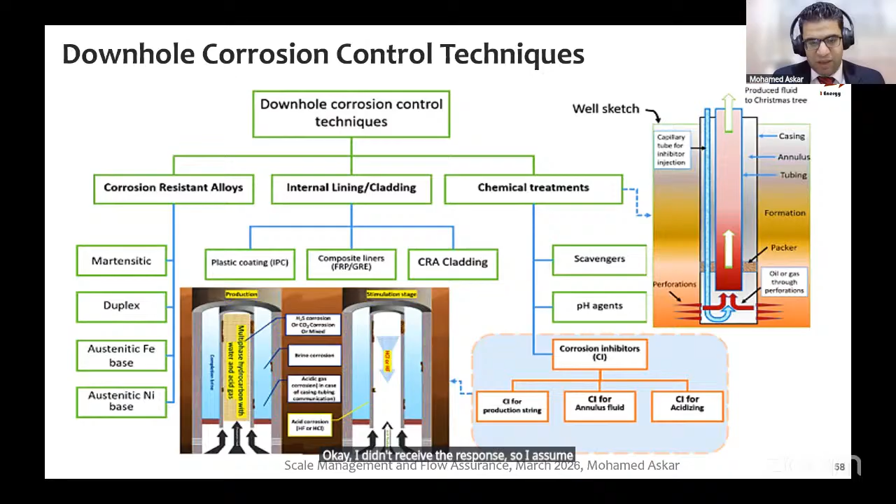How to monitor corrosion? For surface facilities, we use corrosion coupons. This is the same material as the flow line. You put it inside a chamber in the flow line, and after some time you retrieve it to see what weight it has lost during production, because it will lose weight due to corrosion, right?

Some service companies get to the flow line and inspect it, which can be used for corrosion evaluation, for internal and external corrosion of the flow line itself, especially for inaccessible flow lines.

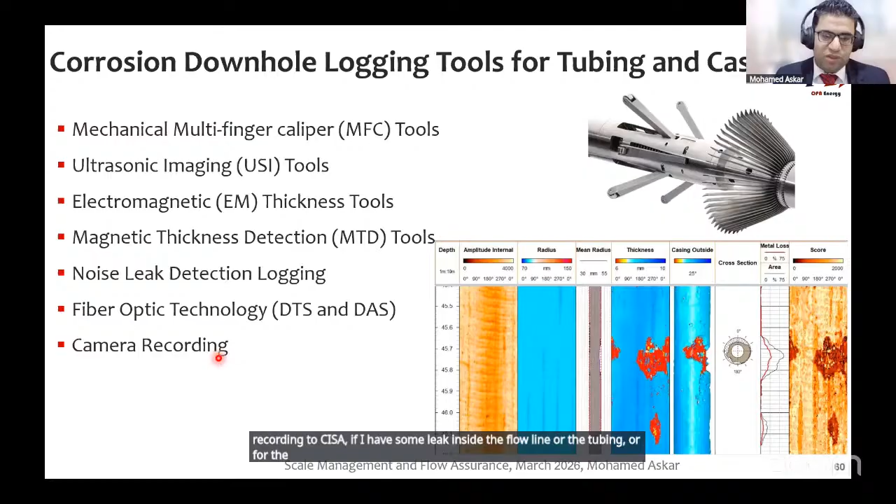Okay, do you have any question? The last part will be the remedial action of flow assurance issues. Do you know what remedial actions you should propose to prevent these flow assurance challenges?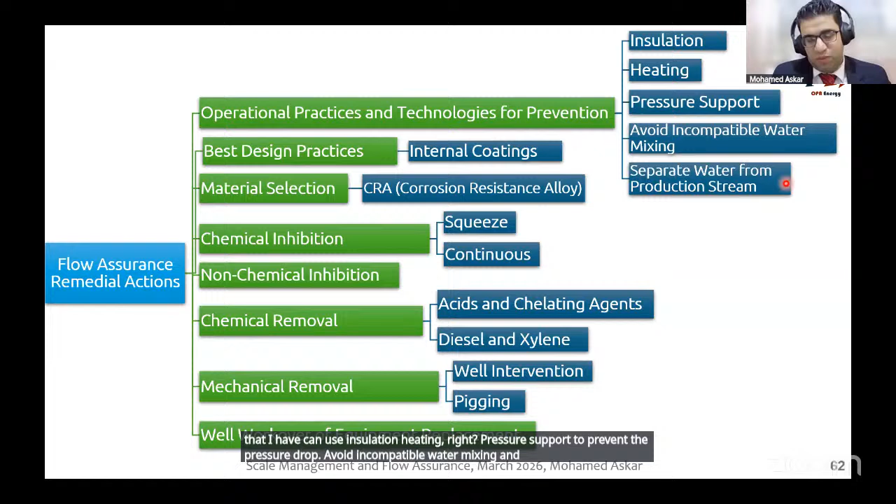I already mentioned all of these during the session, but it's like a revision. So we have some operational practices and technologies for prevention: insulation, heating, pressure support to prevent pressure drop, avoid incompatible water mixing, and separation of water from gas to prevent hydrate formation, and from oil to prevent corrosion and emulsion. Also internal coatings, maybe plastic or corrosion resistance alloys, and maybe use tubing or casing itself as a corrosion resistance alloy, and chemical inhibitors to prevent hydrate, scale, paraffin, or asphaltene, maybe by squeezing into the formation or continuous injection, surface or downhole, and some non-chemical inhibition like using magnetic and electromagnetic waves.

It's a new trend now, new technology in the industry to prevent scale deposition. And the chemical remover, if you have problems that happen and deposit, you should remove them. For scales, I can use water for halite and acids for acid-soluble scales, or chelating agents for hard scales. For paraffin and asphaltene, I can use diesel, xylene, toluene, and other specialized chemicals. For removal, I can use coil tubing, slick line, and scratching or pigging for surface pipelines.

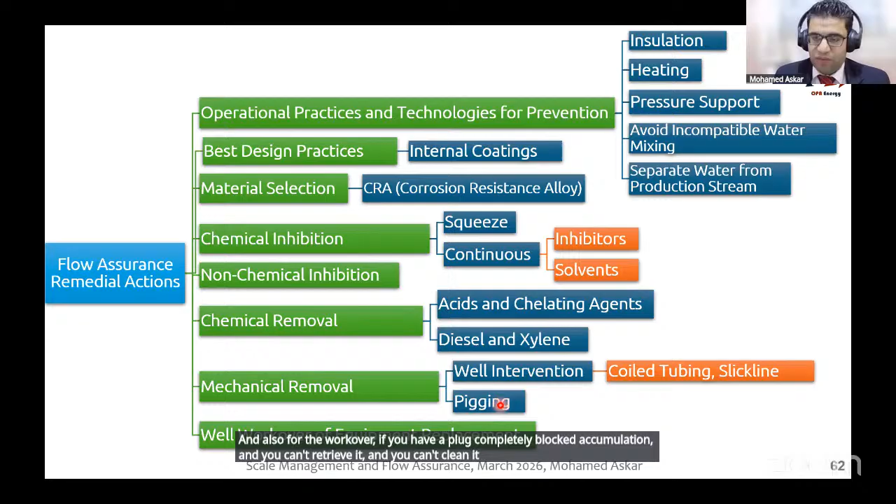Also for the workover, if you have a completely plugged completion and you can't retrieve it, and you can't clean it or dissolve it by mechanical or chemical reaction, you should retrieve the completion and change it.

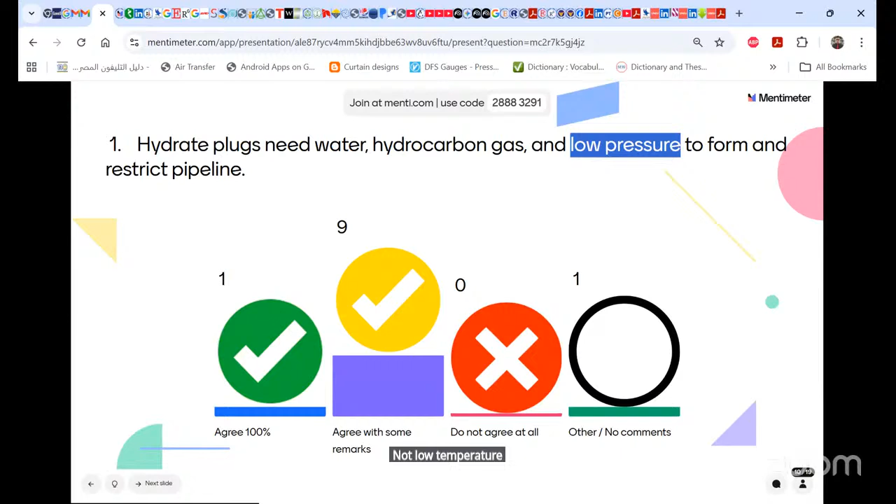Yeah, this is true, agree 100%. And we discussed this in the beginning. You agree 100%? I mean the hydrate, it will happen when you have water with the hydrocarbon, and there will be a temperature reduction, but there is no temperature mentioned here. So we will be disagreeing. Disagree. Good. Because we have low pressure, not low temperature, right? Yeah, correct. If it is low temperature, it will be 100% right. Yes, this is what I meant. Good, but mainly it will be don't agree, right? Or some guys may accept agree with some remarks and say it's okay, we should have some water and hydrocarbon gas, but high pressure, not low pressure. It will be high pressure and low temperature, right?

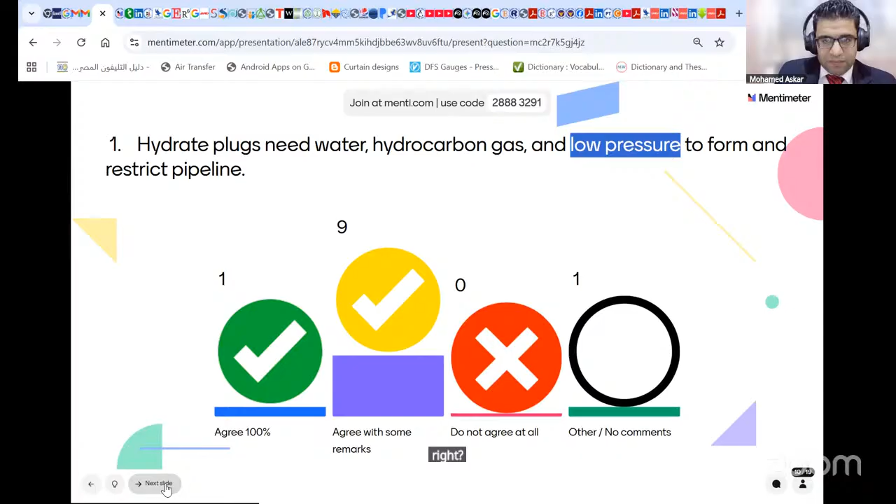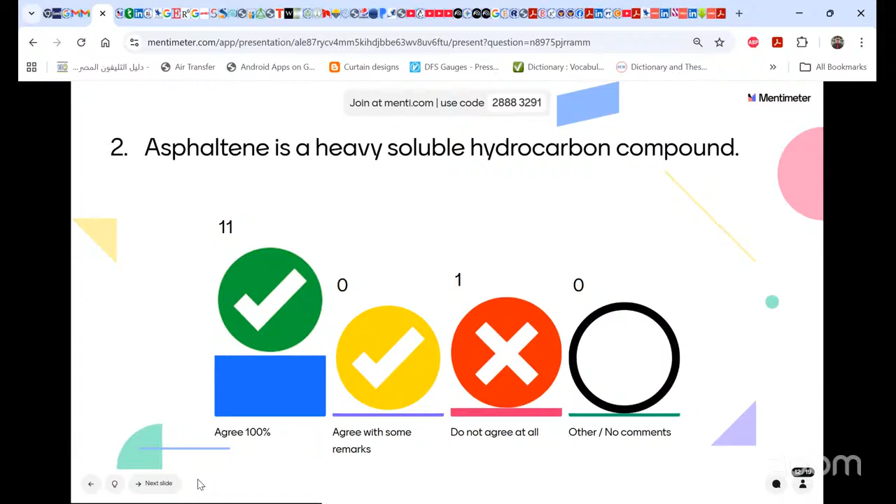Good, for the second question I need a volunteer. Another one. Ibrahim, can you answer this question? Hello, yes, sir, we are listening. Can you read it and see if it is right or wrong? It's wrong, it's non-soluble. Good, mashallah, mashallah. It's non-soluble. I need another volunteer.

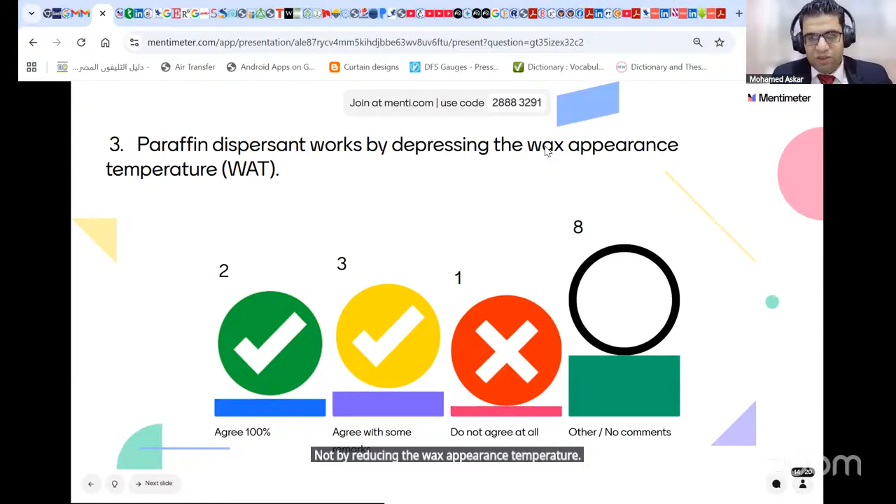Guys, can anyone participate in this question? Maybe Fatima, can you read this question? Paraffin dispersant works by depressing the wax appearance temperature. Honestly, I don't have any comment, but it may be 100% true. And you are right, I didn't mention this during the session. I didn't talk about the paraffin dispersant. By the name, dispersant means that it contains the system or the wax as droplets, not by reducing the wax appearance temperature. The chemicals that reduce the wax appearance temperature are called wax modifier or wax inhibitor or pour point depressant.

So this answer will be wrong. Yes, because paraffin dispersant is not accurate. It will keep the hydrocarbon, keep the wax as small droplets, not depressing the wax appearance temperature. Thank you, engineer.

Thank you. For the fourth question, do you have a volunteer? Maybe Hussein? Maybe Luis? Or any guy that wants to contribute or answer the question? Yes. Don't be shy, you can just contribute with us, maybe by saying any words, maybe right, maybe wrong. But the target here is to hear you and make your contribution.

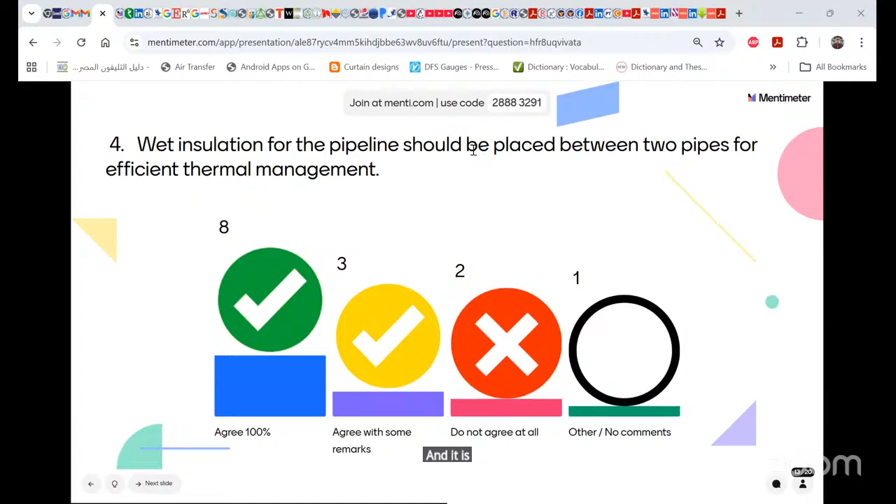Wet insulation for the pipeline should be placed between two pipes for efficient thermal management? Do you agree or don't agree? Agree with some remarks or 100% agreement? Okay, I told you that we have two types of insulation, mainly two types. It's actually many types, like 5 or 6, but the most common types are wet and dry. Wet insulation means that the insulation is facing the environment, it's just coating the outer side of the pipeline. But dry insulation means that you have insulation between two pipes in the annulus between them. So it's wrong, yes, it's wrong. Other types of insulation may be bundle insulation, or vacuum insulation, or phase change insulation, many types. But the most common will be pipe in pipe, which is called dry and wet insulation.

Okay, thank you engineer, got it. Thank you Fatima. Do you have another additional volunteer? We have many guys here in the session, we are now like 21. Mahmoud Yasser. Adil, are you still with us? Adil from OBA.

Zakaria? Okay, do you have any volunteer? Can anybody say hello? I can read the question and answer it. It's pretty easy. May I? Yeah, yes.

Just go ahead: Carbonate scales will deposit when temperature decreases. What do you think? I think it is true. I don't know, when temperature increases? All scales, most scales will deposit when temperature decreases, but carbonate scales - when temperature increases, you do not agree.

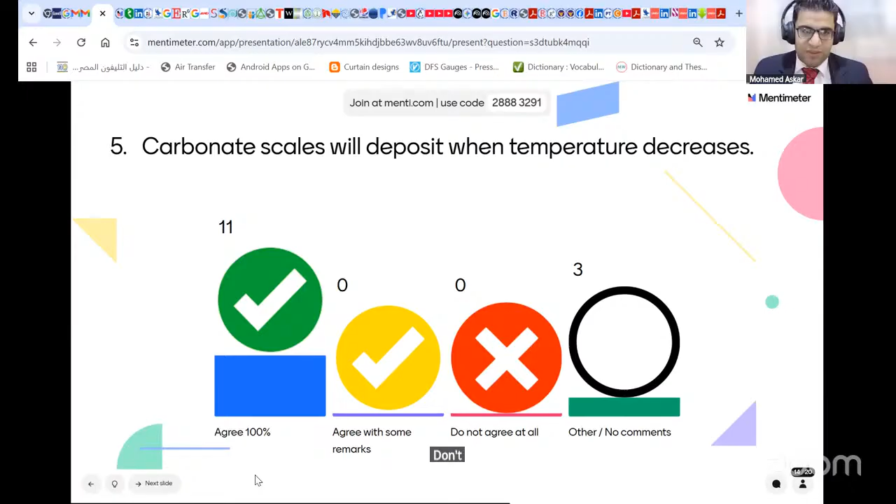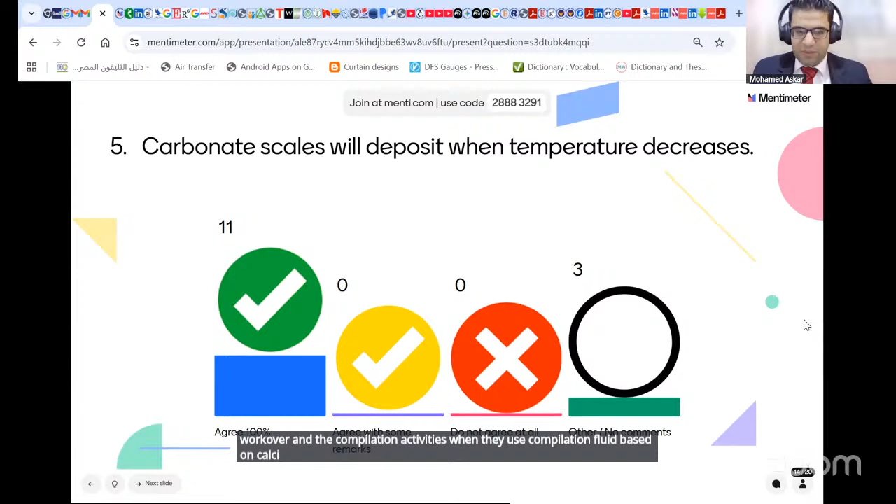Don't agree, good. I told you an example for the completion fluids during workover and completion activities, when they use completion fluid based on calcium chloride or calcium carbonate particles, they pump this fluid inside the formation. They will have some scale deposition due to the high temperature increase. Also for the heaters in our bathroom and household applications, you have some scales inside it, it's called calcium carbonate. And also for the tea boiler and kettle, you have some white deposit inside it, it's mainly calcium carbonate.

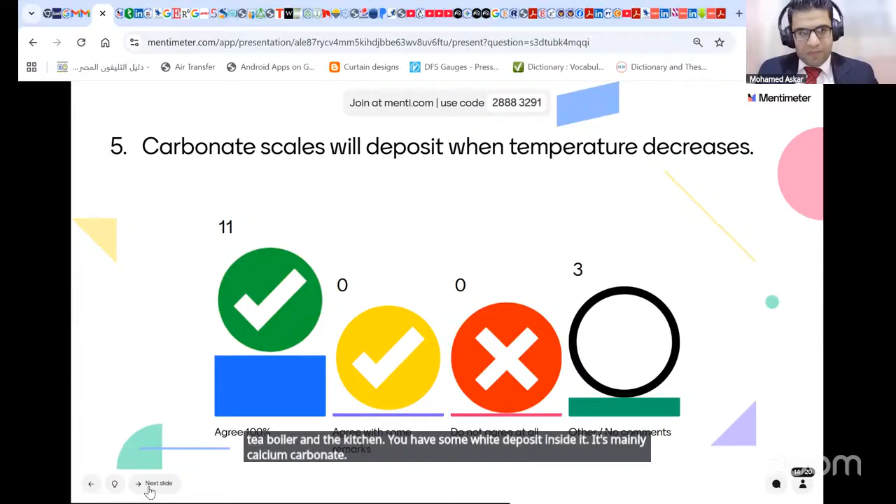For number 6, go ahead Fatima. Scale deposition affinity is not affected by the application of any hydrate chemical inhibitors. What do you think? I think it is right. It's very advanced question.

One second, it's very advanced. We have two issues here: scale deposition and hydrate. To prevent hydrate, I inject hydrate inhibitor, which is mainly methanol, glycols, or ethanol, and other types of low dosage hydrate inhibitor. But for scale deposition, when I inject hydrate inhibitor, it will promote scale deposition. You are curing and dealing with hydrate inhibitor, but at the other side, you are promoting more scale deposition. So yes, it is wrong.

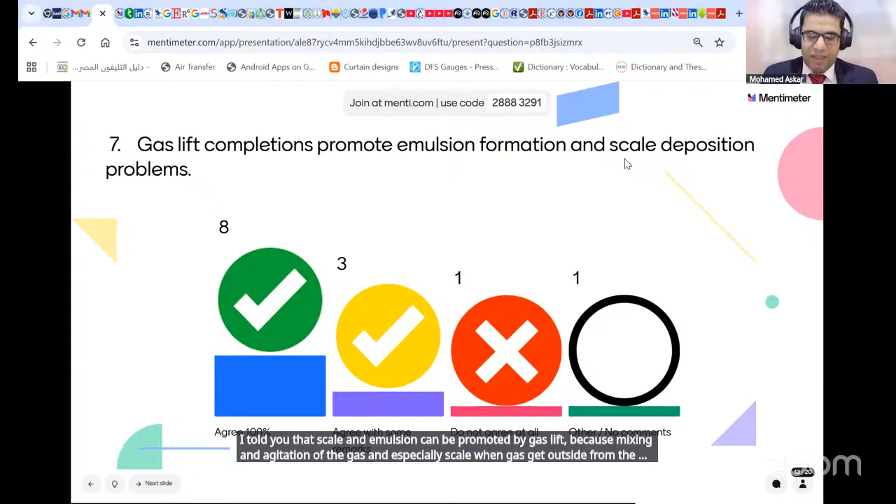Okay, we still have two questions. Gas lift completions promote emulsion formation and scale deposition. I told you that scale and emulsion can be promoted by gas lift because of mixing and agitation of the gas, and especially scale, when gas gets outside from the gas lift valve, it can expand due to the Joule-Thomson effect. The temperature will go down and some scales will deposit.

For number 8, you already answered this question right. Smart or intelligent pigs can inspect the pipeline wall thickness for corrosion monitoring purposes, for inaccessible flow lines that cannot be inspected manually from the surface, like subsea flow lines and buried flow lines.